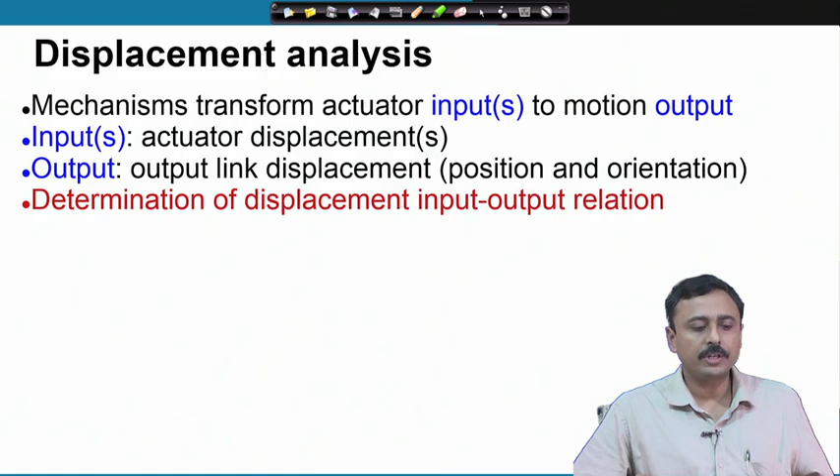As you know, the displacement analysis problem is the determination of the displacement input output relation. Let us look at this problem of a bin which is driven by a mechanism, a 4R mechanism. This is a crossed 4R mechanism, as you can see, which is actuated by this prismatic actuator.

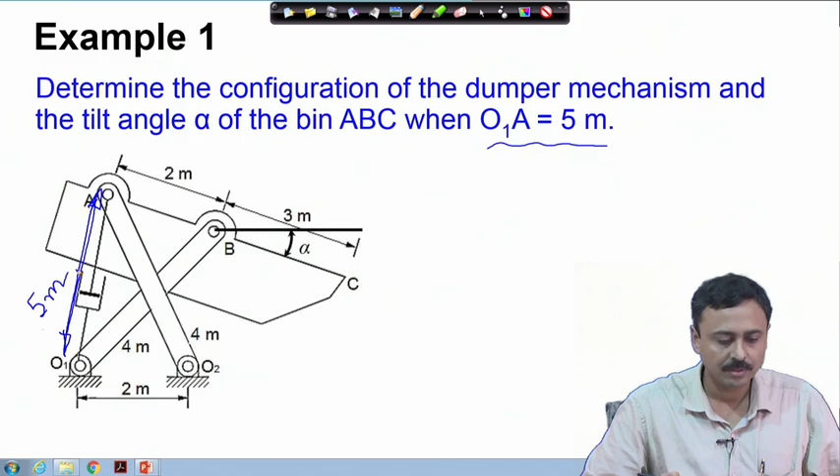Now, the problem is to determine the configuration of the dumper mechanism and the tilt angle alpha of the bin ABC when O1A is 5 meter. So, O1A is this length. When this length is 5 meter, we have to determine the configuration of the mechanism and this tilt angle alpha.

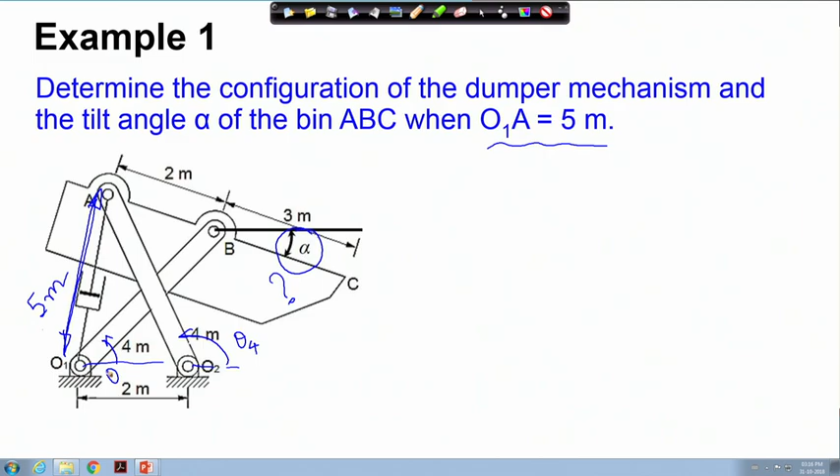Essentially, the configuration of the mechanism means finding out, let us say, this angle, call it theta 4, this angle, call it theta 2, and alpha.

To start the problem, we first define these vectors. The first vector O1 O2 is this, which is L1 vector. O1 B is this, which is the L2 vector, and BA, which is this vector L3.

You can note the directions, the way the vectors have been considered, and O2A is this vector. Finally, O1A, which is this vector. So, this is the vector O1A, which is denoted as the L vector.

In order to represent these vectors, we will require a coordinate system. Let me draw that coordinate system. So, we will consider this as x and this as the y axis. Using this coordinate system, we will represent all these vectors.

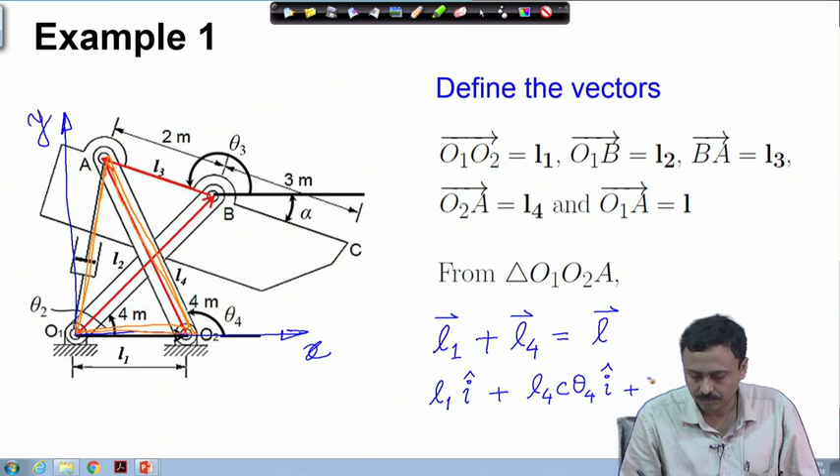Now, using the coordinate system, we can now represent the vectors. L1 is nothing but L1 I cap, it is along the x axis. L4 is L4 cosine theta 4 I cap plus L4 sin theta 4 j cap, and this must be equal to the vector L.

So this vector L I will write as L cosine theta I cap plus L sin theta j cap, where theta is this angle. This angle I call theta.

Now, if you compare the terms on both sides, you can very easily see that L cosine theta must be equal to L1 plus L4 cosine theta 4, and L sin theta must be equal to L4 sin theta 4.

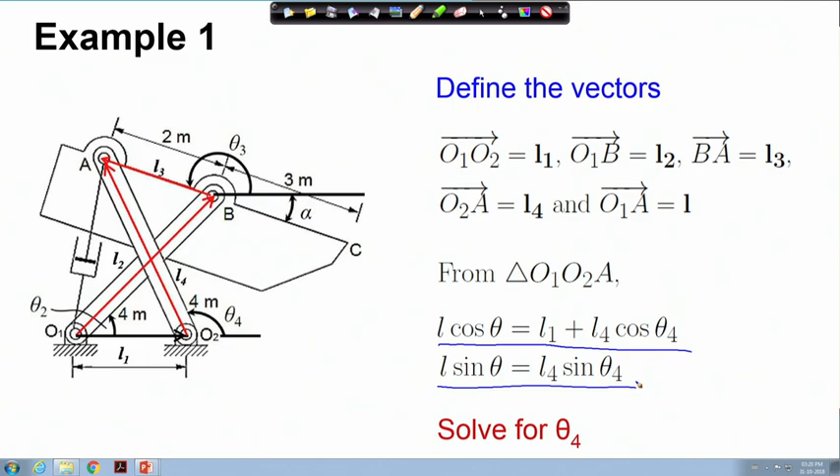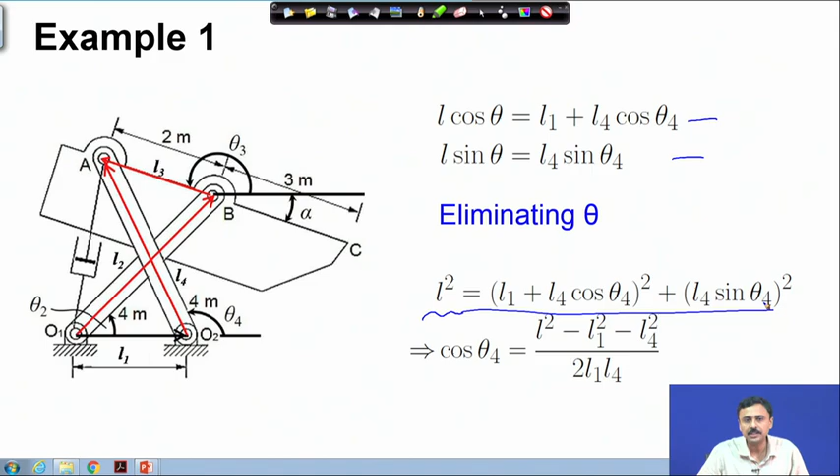If I eliminate theta, then I can solve for theta 4, which I will show you here. So essentially we square and add these two relations and get L square. Now this equation has only theta 4 as unknown. Therefore I can solve theta 4 using this equation. Now there will be two solutions, as you know.

Given the parameters of the problem, L is equal to 5 meter, this is L, remember. So this is 5 meter, L1 is 2 meter and L4 is 4 meter.

If you substitute in this, you will get theta 4 as 71.79 degree. Now this is the solution which is relevant to the configuration.

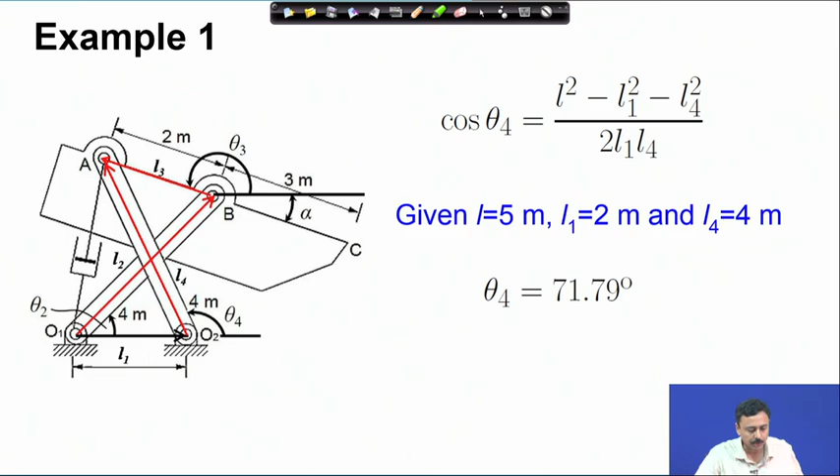Next, we will look at this vector loop equation: L2, which is this, plus L3, which is this, must be equal to L1 plus L4.

So this vector loop equation, here we have just now solved theta 4. We know theta 4 here, which means L4 is completely known, and L1 is completely known. Now L2 will involve theta 2 and L3 will involve theta 3. If I eliminate theta 3, which I do as follows, I write L3 vector equals L1 vector plus L4 vector minus L2 vector.

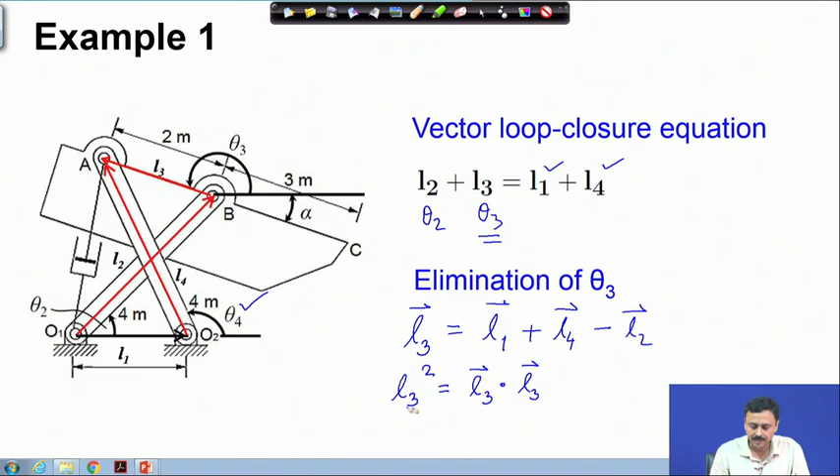Take the dot product with itself. Then theta 3 gets eliminated, and what I get from this side is this equation. So L3 square is this quantity square plus this quantity square.

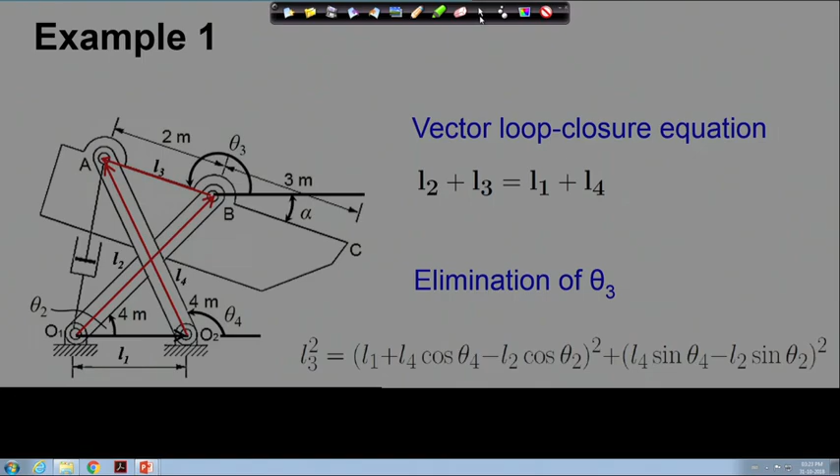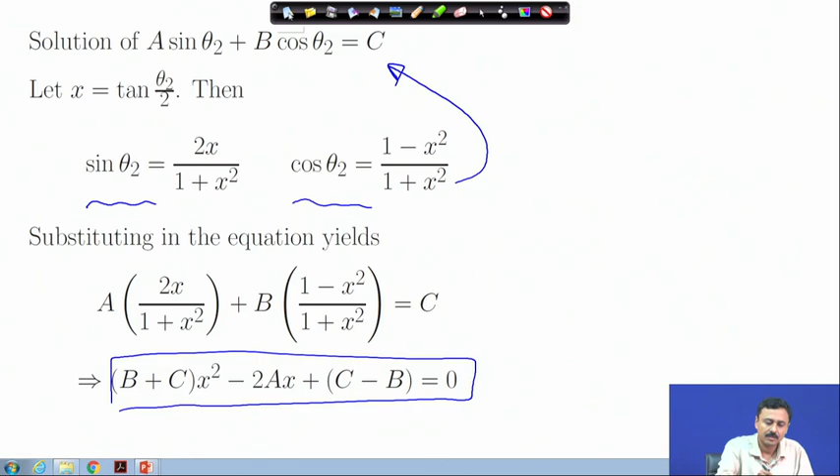By making this substitution x equal to tan theta 2 by 2, representing sin theta 2 and cosine theta 2 in terms of x, substituting in this master equation, finally getting a quadratic equation in x, whose solution is known to us. There are two solutions depending on the sign, plus or minus.

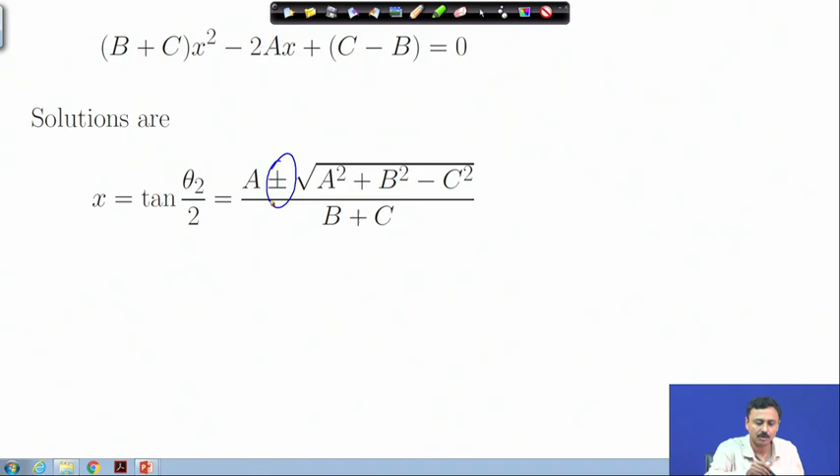Let us get back to our mechanism now. So we have these two solutions of theta 2, which are given by theta 2(1) and theta 2(2). From these expressions we can find them out.

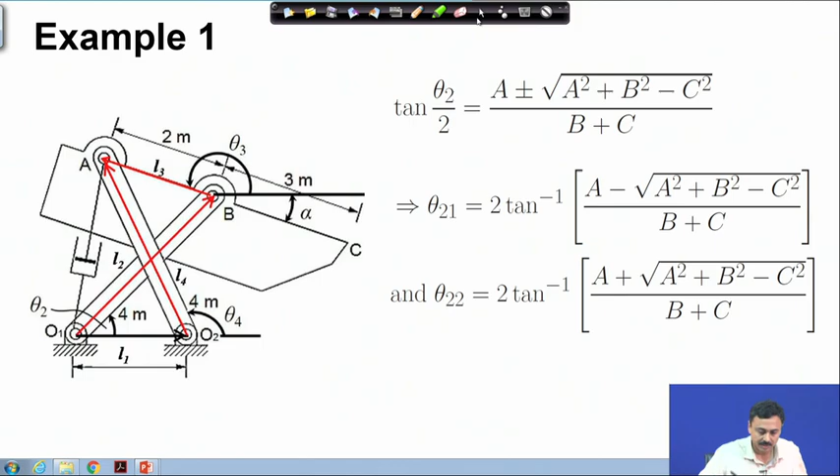Therefore, given these link lengths and theta 4, we can now find out theta 2. Once we have theta 2, then we can find out theta 3, which we have discussed before. So tangent of theta 3 is given by this expression. Since we have solved for theta 4 and theta 2, we know the right hand side and therefore can solve for theta 3.

Always remember, you have to use the atan2 function to determine the correct quadrant of theta 3.

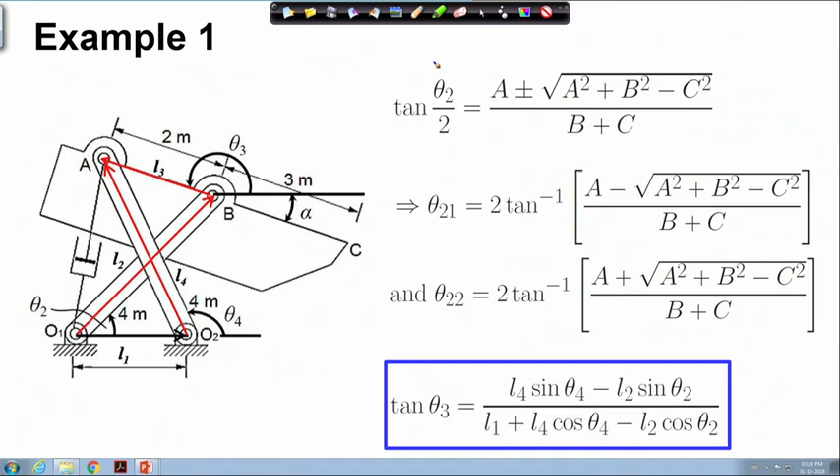So when we solve for theta 2 for the given data, we already have theta 4 as 71.79 degrees. We get these two solutions. So let us look at the configuration. This is O1, this is O2. We have theta 4 as 71.79 degrees, which is this angle.

Therefore this point, this hinge, is A. Now we have two solutions for theta 2. One solution would look something like this. The other solution is essentially this. So this solution angle is 71.7, and this solution is 27.17 degrees.

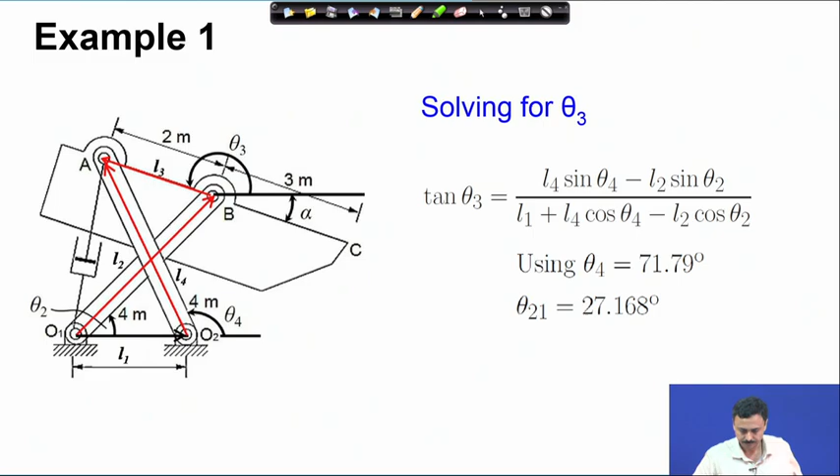So we use these two values of theta 4 and theta 2, and finally we get theta 3 as 98.89 degrees, and alpha is nothing but pi minus theta 3. So this is theta 3, which in the current configuration is 98.89 degrees, and therefore alpha, which is pi minus theta 3, is 81.1 degrees. So let me once again draw out this configuration.

This angle is 71.79 degrees, this angle is 27.17 degrees, and this angle, which is theta 3, is 98.9 degrees. So this is the configuration of the mechanism.

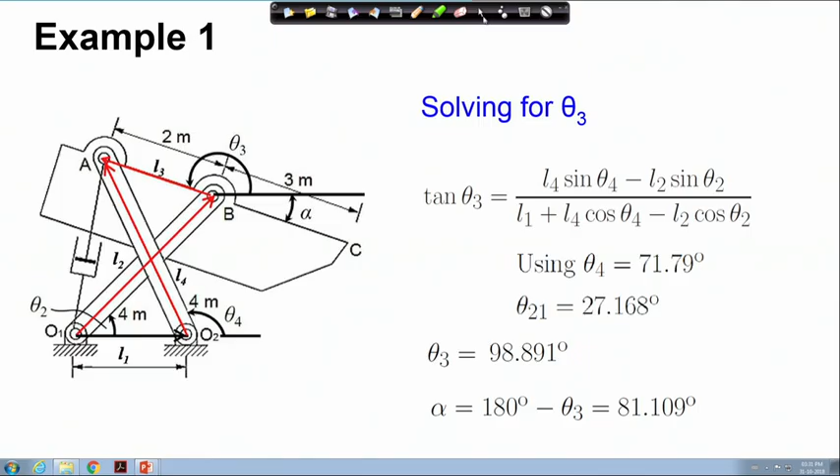So this is the bin. We have discussed an example of a 4R mechanism of a bin which can be tilted using a prismatic actuator. So with that, I will conclude this example lecture.